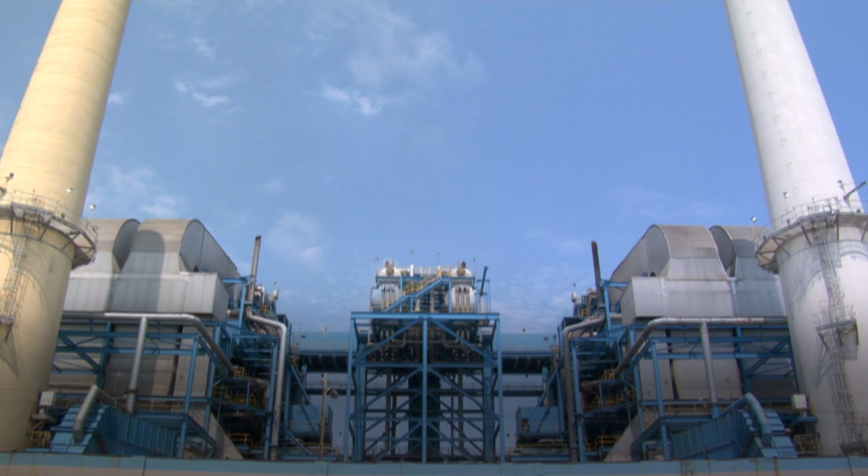Number 9: Next-gen nuclear power. Since the Fukushima nuclear plant tragedy in Japan in 2011 following a severe earthquake, the nuclear power sector has been working on safer technology solutions. Nuclear reactors dozens or even hundreds of times smaller and more widely distributed have been proposed so far. Consider nuclear power facilities the size of warehouses that serve neighborhoods rather than entire cities. Some designs for these modular reactors include passive safety systems to limit the risk of a radioactive discharge like the one that shook Japan.

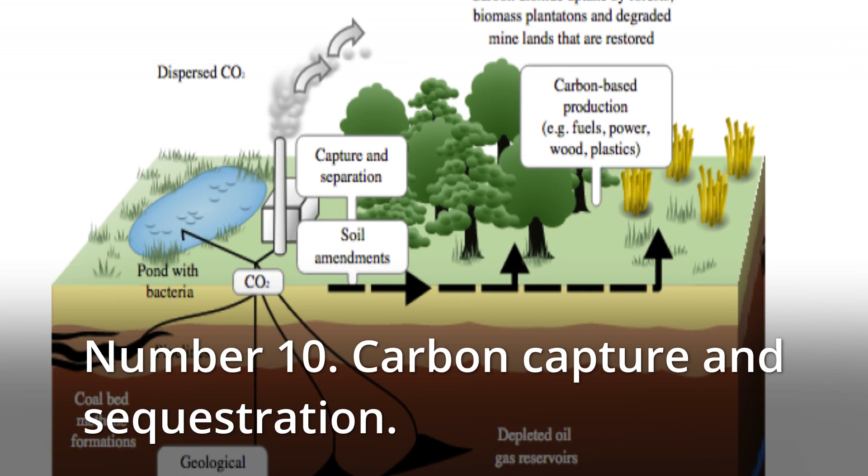Nuclear reactors will also be built offshore, similar to the floating platforms used by the oil and gas industry. A Category 5 hurricane would be no match for these. Furthermore, because the reactor cores would be buried beneath the platform, a constant supply of cold seawater would be available to cool the reactor core in the event of a power outage.

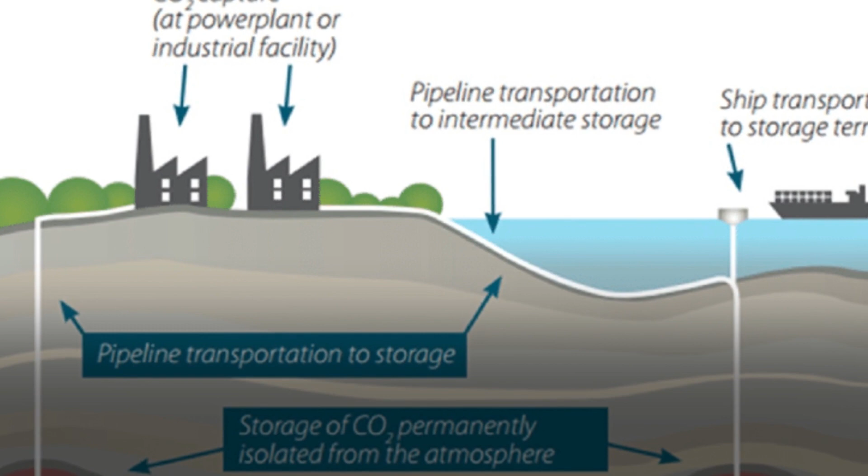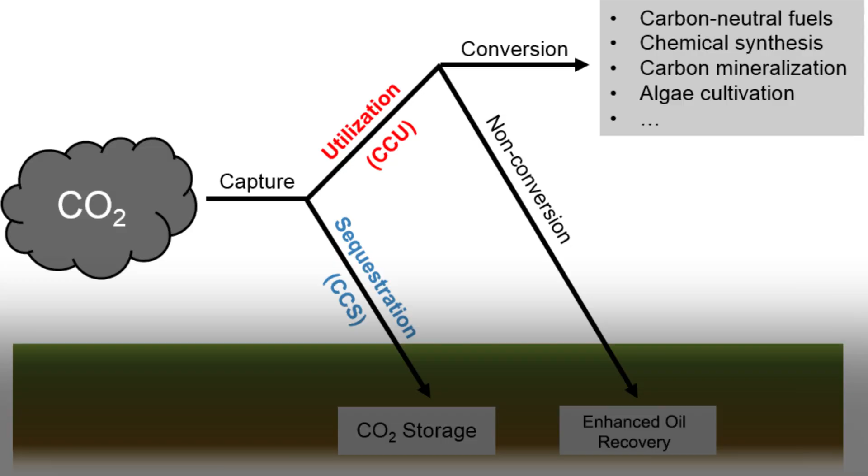Number 8: Nuclear fusion. Nuclear fusion, which promises endless carbon-free power without producing harmful nuclear waste, is the holy grail of clean energy generation. Fusion reactors could provide a lot of energy with little environmental impact if scientists can figure out how to manage the same kind of atomic reaction that occurs at the sun's core.

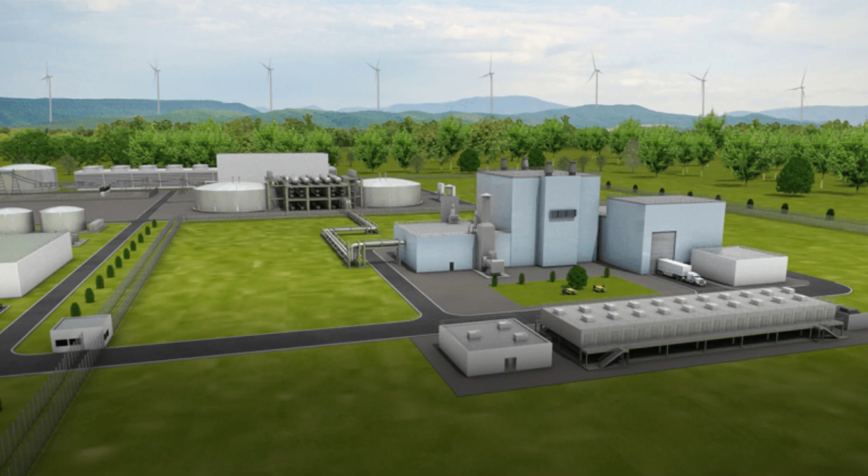While the technology is still 30 years away from maturity, Lockheed Martin, a defense contractor, has made strides. Its scientists devised a tiny fusion reactor design in October that may potentially fit in a tractor trailer and generate 100 megawatts of power. Within 5 years, the company intends to have a functional prototype and a commercial version.

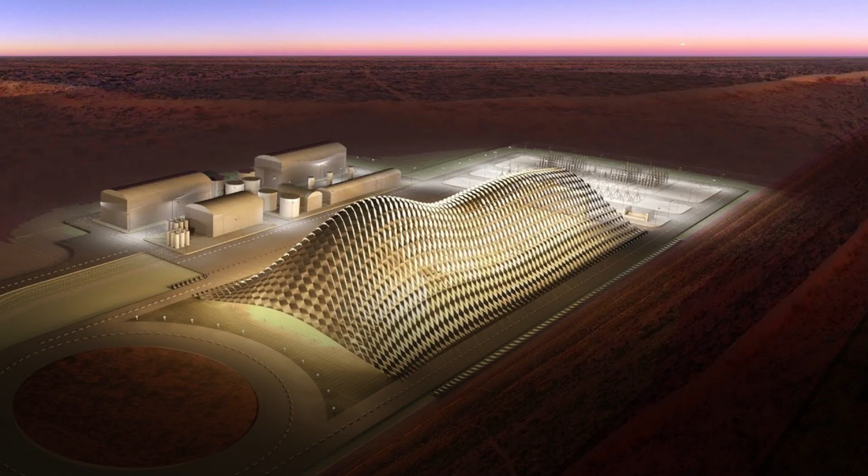Number 7: Offshore wind. Wind power is expected to become widely used in the next 25 years, thanks to developments in turbine blade designs that borrow from aeronautics technology to extract the most energy from each gust of wind. Wind turbines will increasingly be located offshore, where countries such as Denmark are already demonstrating to the rest of the world the benefits of offshore wind energy.

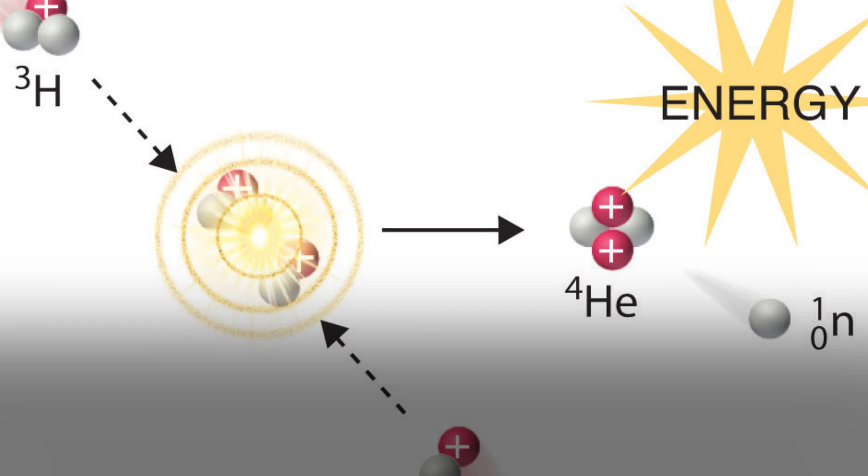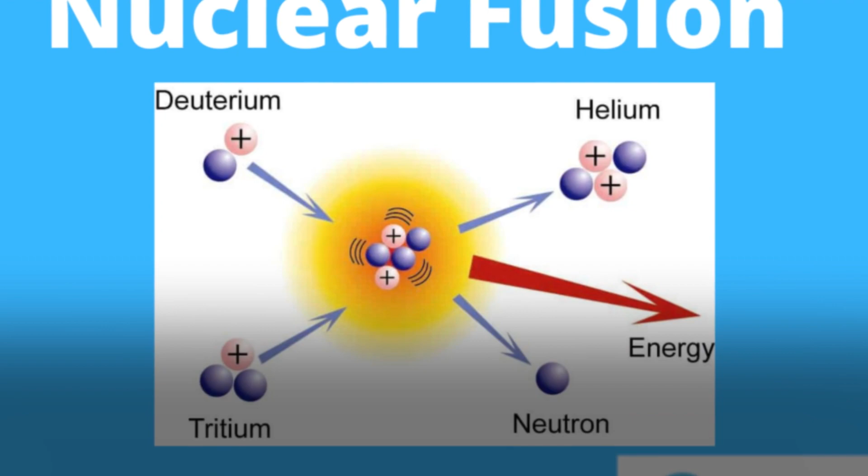Number 6: Geothermal. Geothermal energy is projected to explode in the coming decades as scientists discover a commercially viable means to capture energy deep beneath the Earth's crust. Researchers in Iceland have been drilling straight into volcanoes for several years to access very hot water and magma reserves, with the goal of someday converting these high-temperature resources into significantly more productive geothermal power stations.

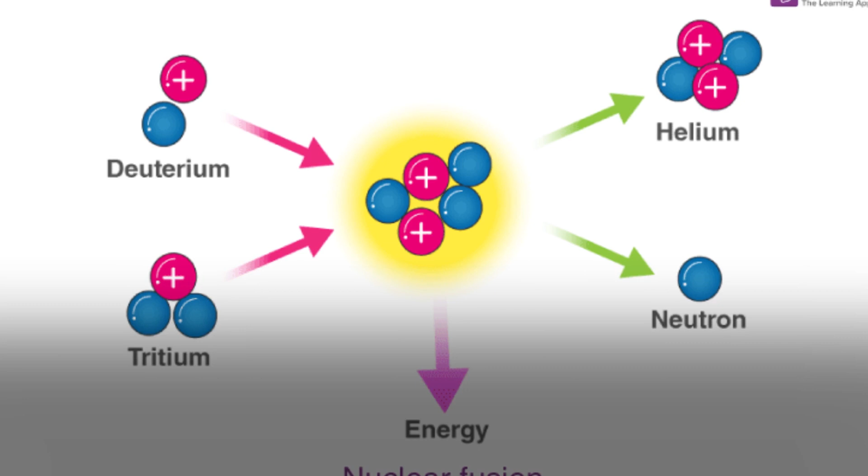The goal is to produce sophisticated technology that can be exported within the next 10 years. If the research pays off, it may soon be able to tap considerably hotter geothermal resources around the world that can create 10 times the amount of electricity currently produced by geothermal plants.

Researchers predict that vast reservoirs of heat energy are attainable just 1,000 meters below the seabed at the Juan de Fuca Ridge off the coast of Washington state, making drilling geothermal wells offshore a possibility in the future.

Number 5: Space technologies. For the time being, space-based energy technologies such as extracting hydrogen from the moon to power fuel cells on Earth, or circling solar arrays that absorb all-day direct sunlight and beam the energy back to ground stations through radio or microwaves, remain science fantasy.

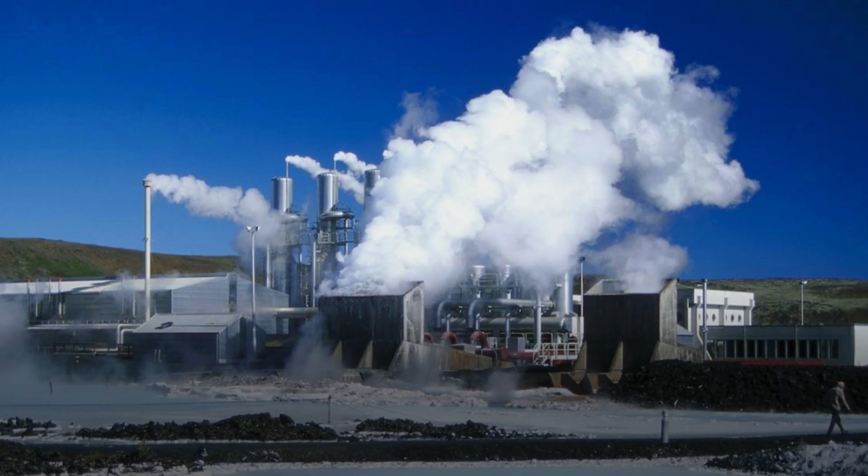NASA and the Naval Research Laboratory of the United States are both investing in technology that could be marketed in 25 years. The ongoing private space revolution, which has seen businesses like SpaceX reduce the cost of transporting goods into orbit, bodes well for future space endeavors.

Solaren, a startup based in Southern California, has signed an agreement with Pacific Gas and Electric to provide space-based solar power by the end of the decade. Keep an eye out for updates.

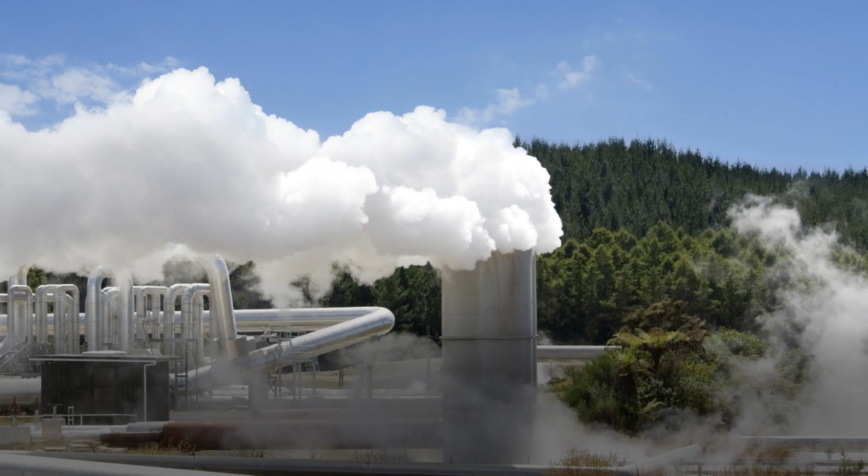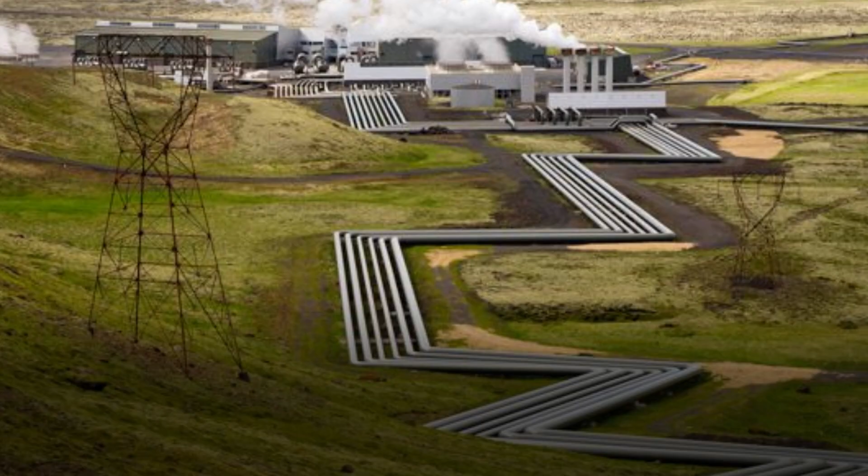Number 4: Solar fuels. Scientists have long been enthralled by the prospect of transforming sunlight, water, and carbon dioxide into usable chemical energy that can be stored for long periods of time, much like gasoline. Solar fuels are made by splitting carbon atoms from carbon dioxide molecules taken from the atmosphere. Then, by separating hydrogen atoms from water, you may combine carbon and hydrogen to generate hydrocarbons, which are the same chemical entities that make up today's fossil fuels.

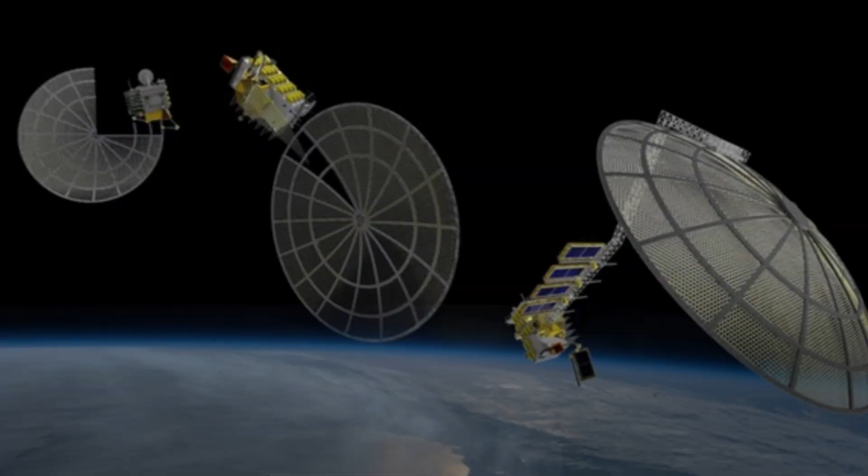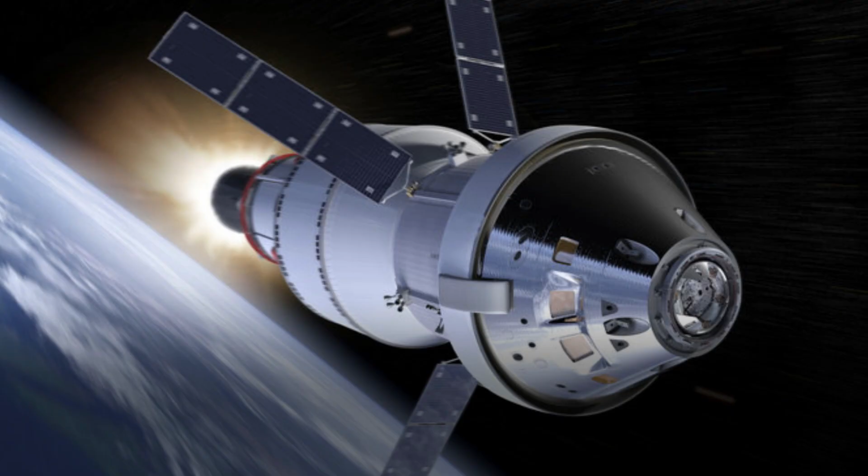If scientists can scale up these chemical reactions utilizing solar energy as a catalyst, they'll be able to convert the sun's energy into a storable medium while also recycling carbon dioxide from the atmosphere into useful chemical fuel. Although the science isn't quite there yet, scientists from Harvard's Nocera Lab, MIT's Grossman Group, and the University of North Carolina's Energy Frontier Research Center have made significant progress in the last decade.

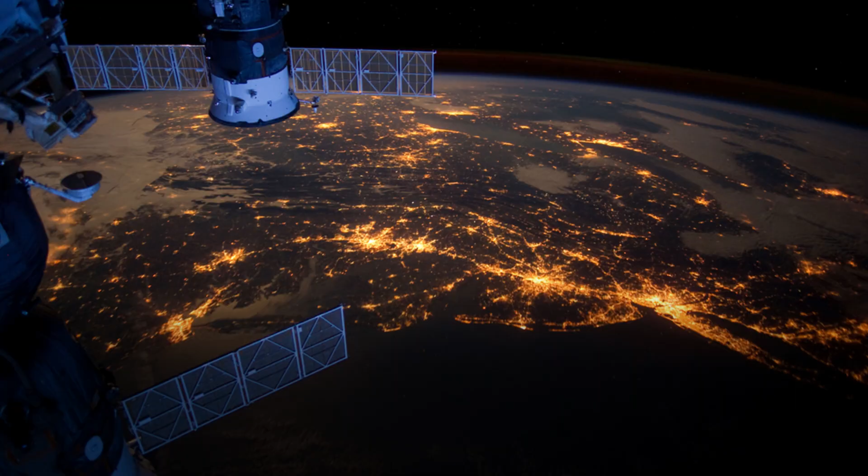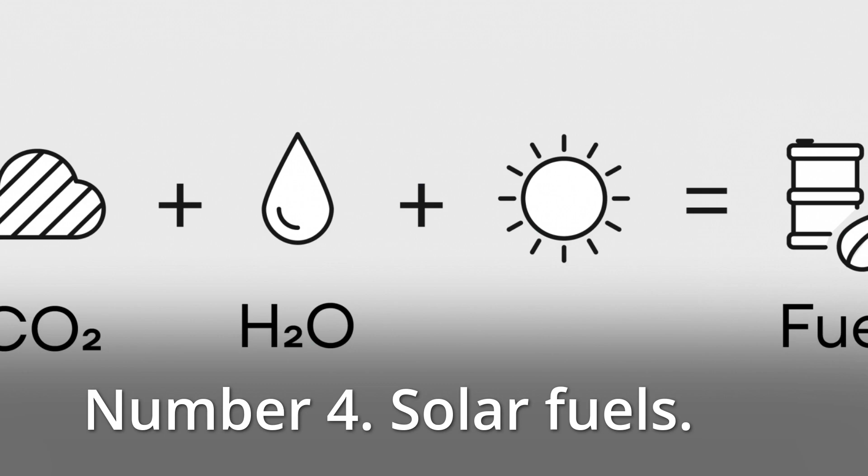Number 3: Algae Biofuel. Consider the parallel with solar power if you're still unconvinced about naturally occurring strains. While ultra-efficient solar cells are becoming more widely available, the most efficient solar cell does not always imply the most cost-effective solar installation or the largest range of applications. Consider the difference between low-efficiency organic solar cells and their high-efficiency silicon counterparts, and you'll get the idea.

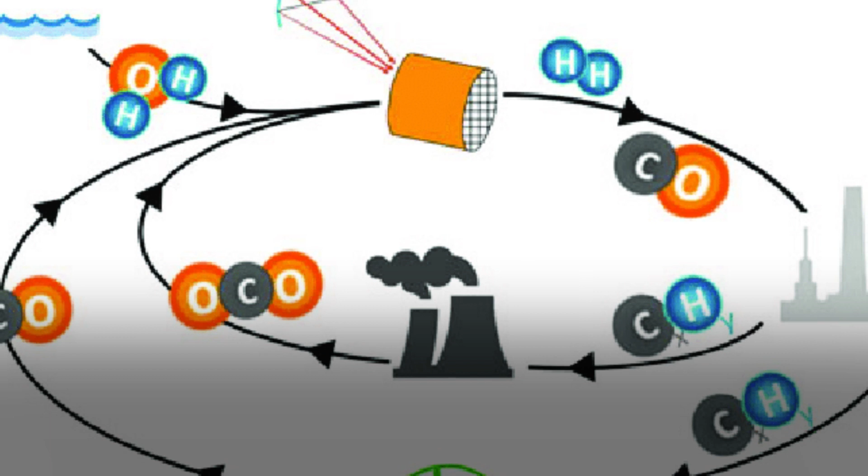EHE and algal systems have taken a comprehensive, energy-efficient approach to algae biofuel production. While the new algal biofuel system may not have the most effective strains for biofuel production, it is a problem solver that takes a liability, in this case municipal wastewater, and turns it into a source of revenue.

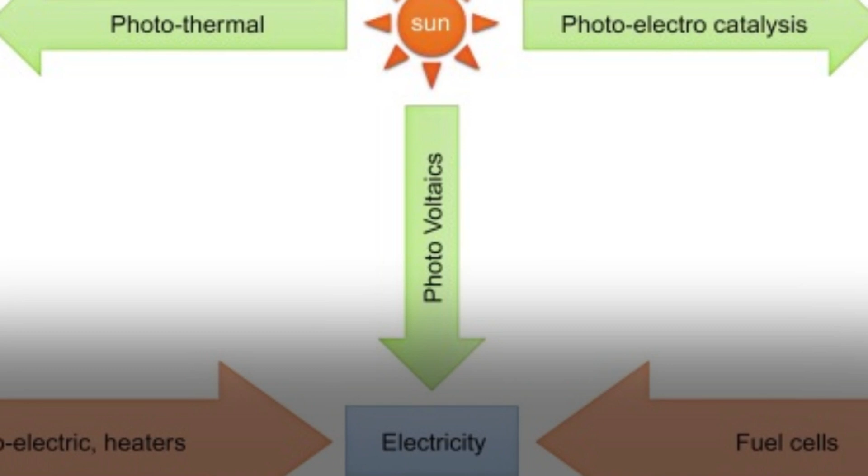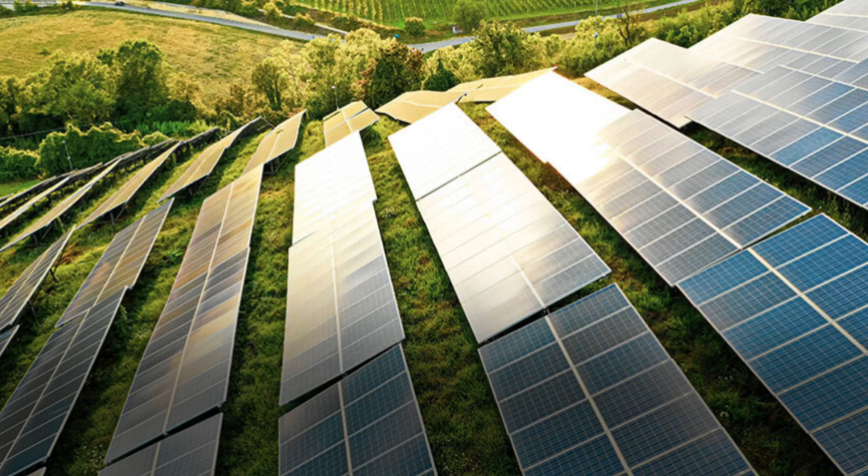Number 2: Flying wind farms. Altaeros, which was founded by grads Ben Glass (SM '08, '10) and Adam Rein (MBA '10), has created the world's first commercial airborne wind turbine, which uses a helium-filled shell to float as high as a skyscraper and harvest the stronger, more consistent winds available at that level.

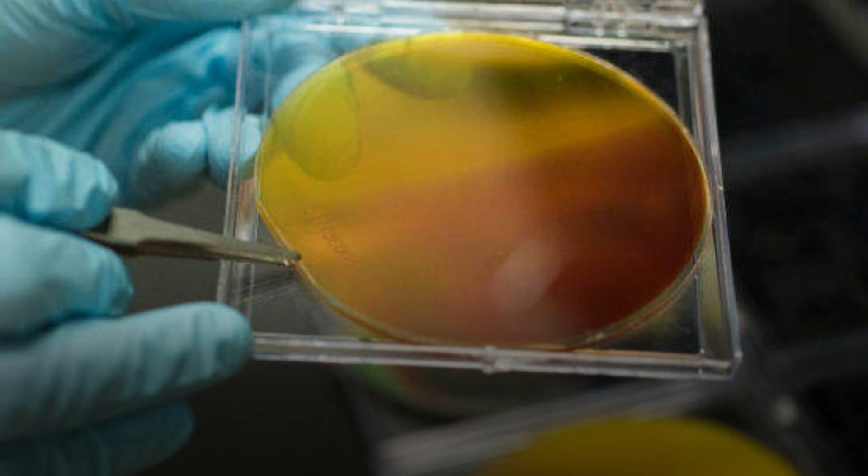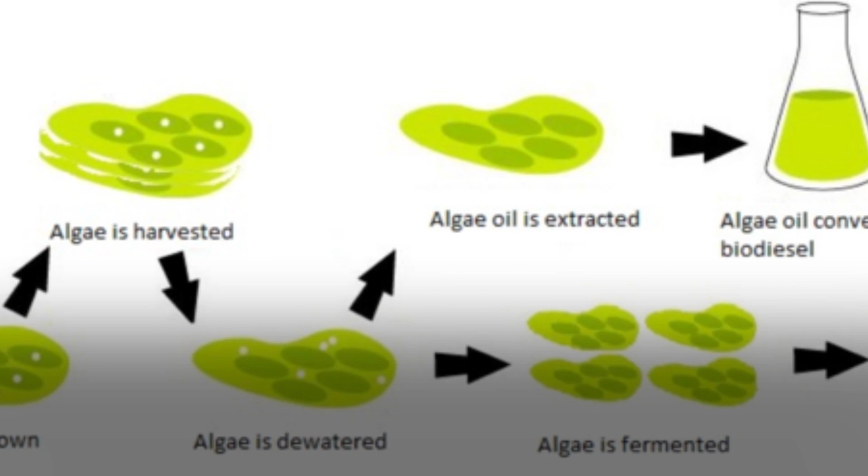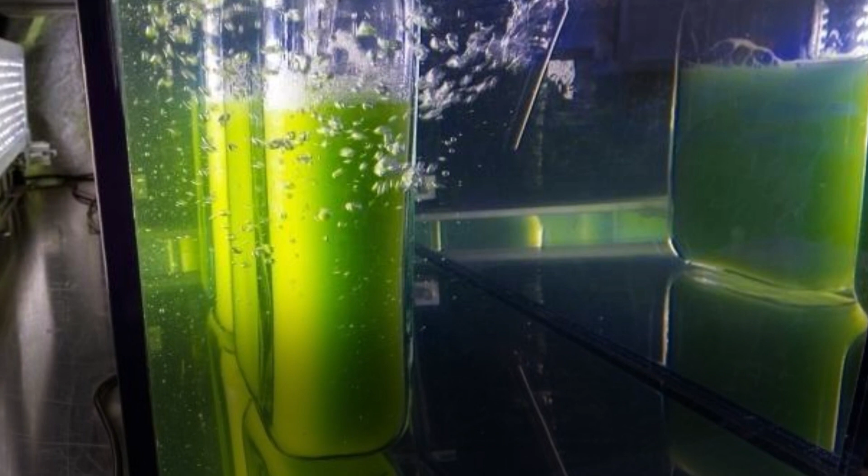The buoyant air turbine, or BAT, technology, which has been proven to produce twice the energy of comparably sized tower-mounted turbines, is presently being prepared for commercial deployment in rural Alaska. The BAT hovers 1,000 to 2,000 feet above ground, surrounded by a cylindrical, 35-foot-long inflatable shell constructed of the same heavy-duty fabric used in blimps and sails, where winds are 5 to 8 times stronger and more consistent than winds at tower level, roughly 100 to 300 feet.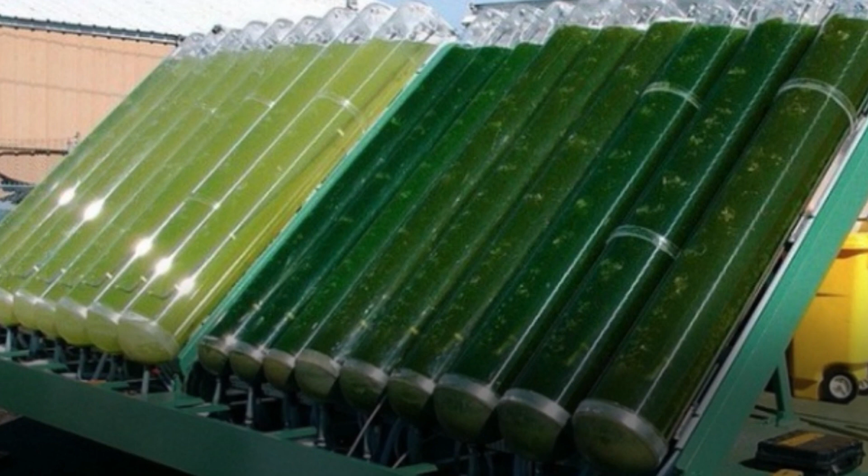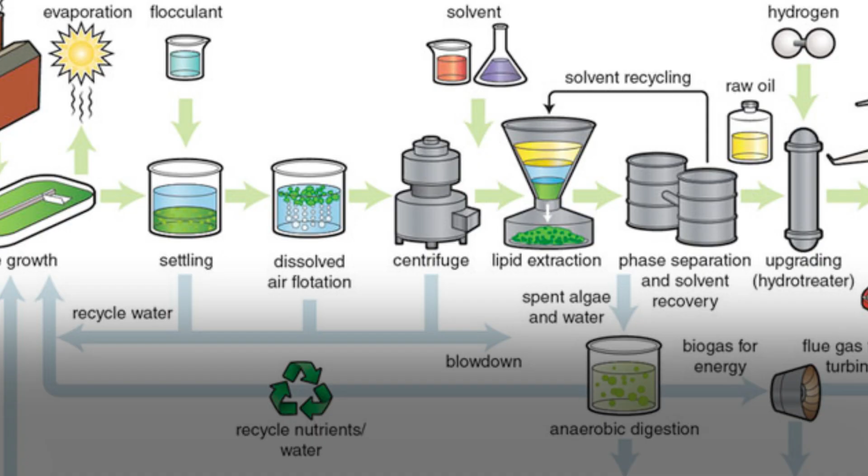Number 1: Hydrogen fuel cells. A hydrogen aircraft is a plane that runs on hydrogen fuel as a source of propulsion. Hydrogen can either be consumed in a jet engine or another type of internal combustion engine, or it can be utilized to power a propeller using a fuel cell. Unlike other planes, which store fuel in the wings, hydrogen planes often have hydrogen fuel tanks built within the fuselage.

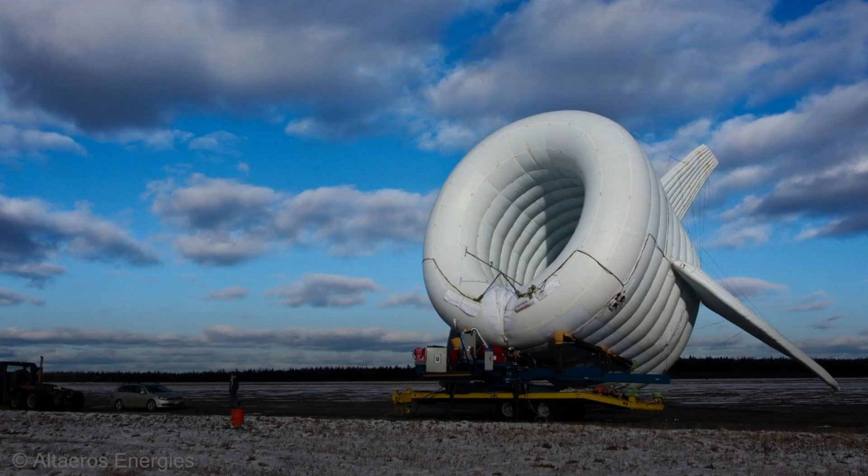Large commercial hydrogen aircraft could be produced by 2020, according to research from Pennsylvania State University in 2006. But they'll probably not enter service until closer to 2040. In the near future, there has been an increase in interest in employing fuel cell airplanes as personal air vehicles.

The European Union's Cryoplane research project evaluated the technological feasibility, safety, environmental compatibility, and economic viability of using liquid hydrogen as an aircraft fuel, in collaboration with Airbus and 34 other partner firms. This was completed in the year 2002.

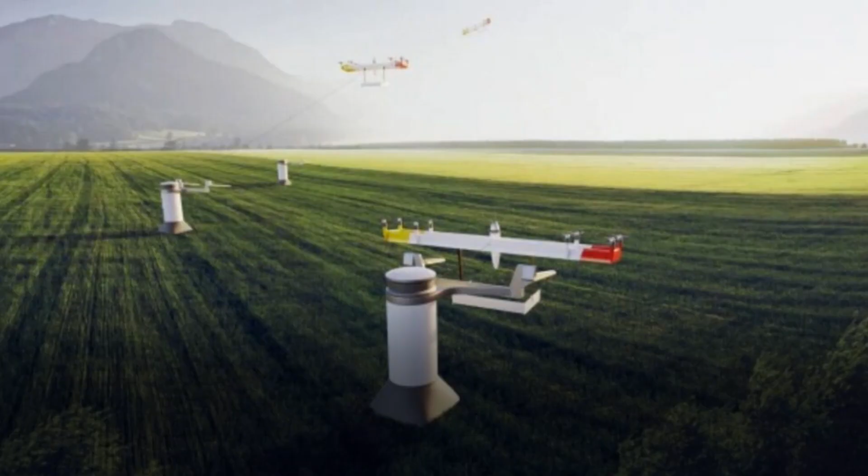As of 2021, ZeroAvia is working on a fuel cell-powered aircraft that will be capable of carrying up to 20 passengers for 350 nautical miles. A 100-passenger turboprop, a 200-passenger turbofan, and a futuristic design based on a blended wing body were exhibited by Airbus, with deployment planned for 2035.

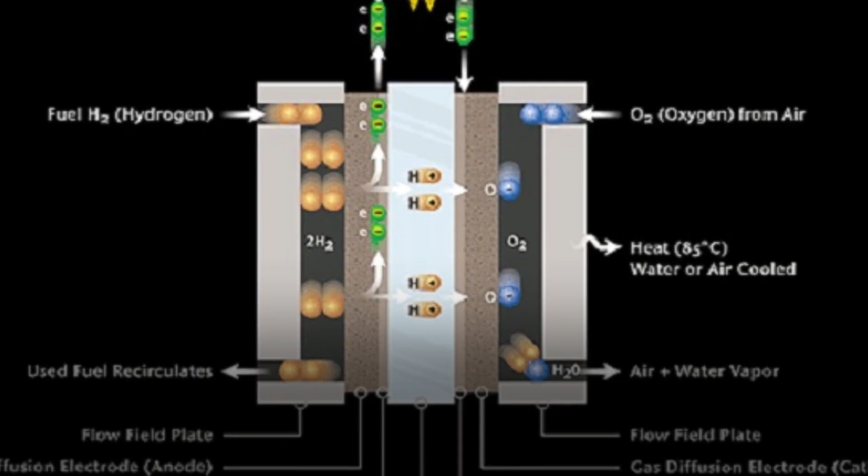In operation, hydrogen aircraft with a fuel cell design emit zero CO2 and zero NOx, whereas aircraft using hydrogen as a fuel for a jet engine or an internal combustion engine emit zero CO2 but do emit NOx.